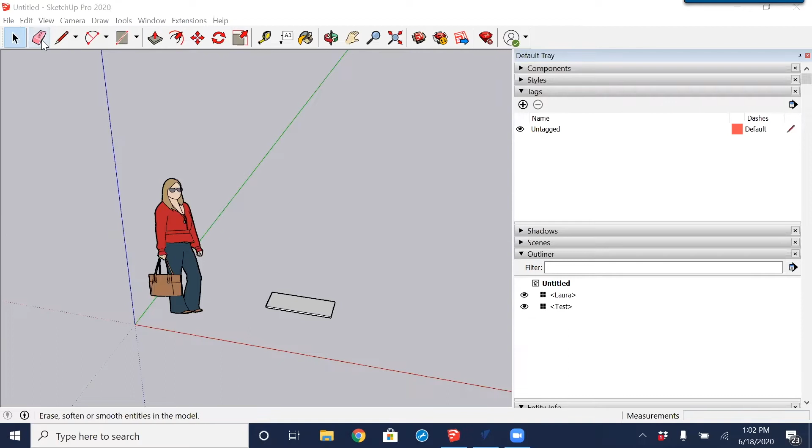Before we get into that, I'm just going to start off by going into SketchUp and doing New, so we can see right from the beginning. And no, I do not need to save that. And we are completely new.

So the big advantage of SketchUp is this thing called the 3D Warehouse. That is where you're able to upload and also download work that others have submitted to the 3D Warehouse. You could use the items just for decorations within your model for presentations. Some of the warehouse items can also be turned into VCarve Pro files. So we're going to take a look at the 3D Warehouse. That is found under the Window menu, clicking 3D Warehouse. We'll also explore how to create some of this.

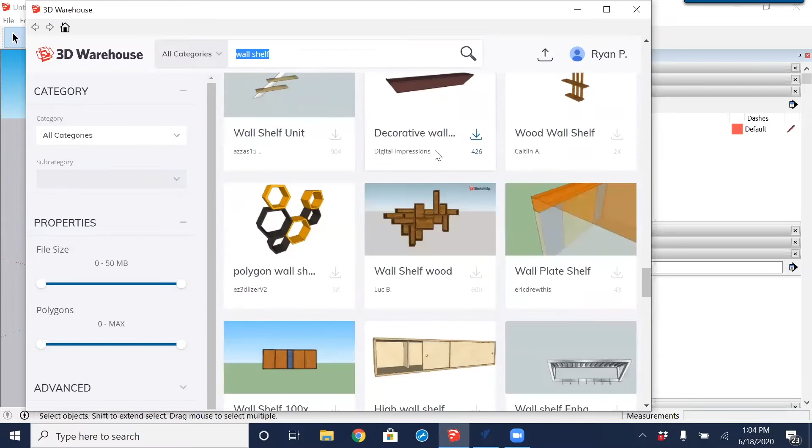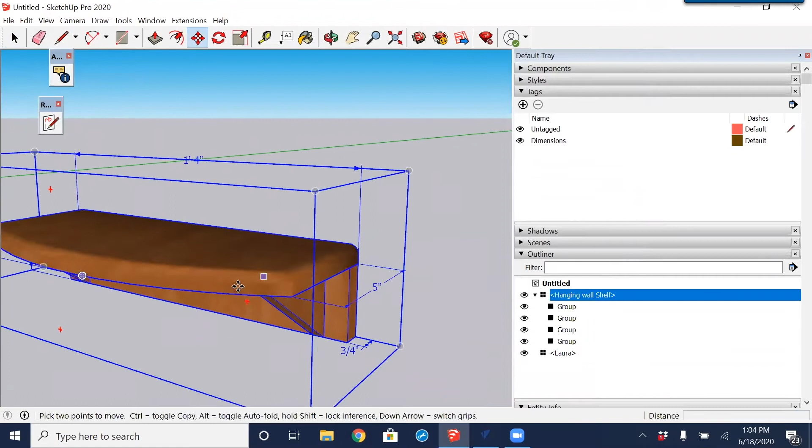So I just did a search here for wall shelf to see if there's any we might be able to just bring in, cut and export out. Not all of these warehouse models are created equal. Not all of them are able to be cut, and we'll learn why. So let's just try this hanging wall shelf here and select download, and I can download that directly into the sketch, place it on the screen, and click it there. So it is brought in right here. It does have some dimensions drawn in it, which we may or may not need.

And then we see that it is made up of components here. So this is a good sign that an item like this can be brought in as separate components into VCarve Pro to be able to orient and lay flat. So quickly to show that, and it may or may not work, we're going to find out. So I'm going to go to File and do a Save As.

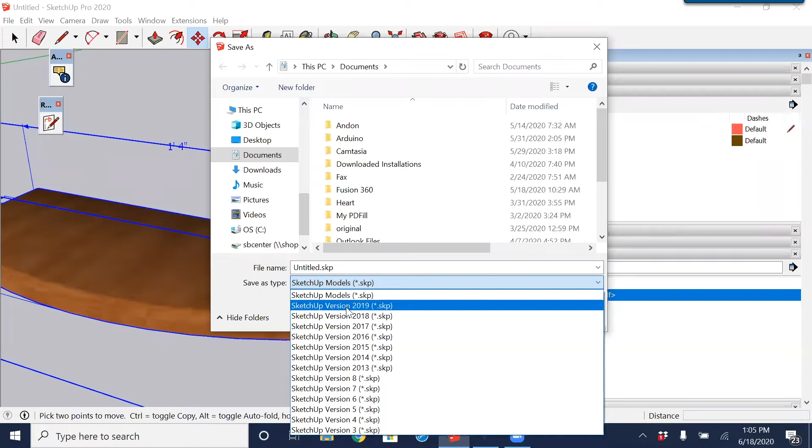And one thing that I have to do, and depending on what version of SketchUp you have, you may or may not need to do this: I need to back up to the 2019 version. The VCarve Pro import will not work with the newer versions of SketchUp. So I'm going to save this as a 2019 and just call that shelf.

And I am going to actually just put that in my downloads folder. The reason why I'm doing the downloads folder is that my downloads folder is a folder that I consider an okay-to-delete folder. So anything that I put in my downloads folder, I just know that I don't need to keep it. I'm okay to just randomly delete it.

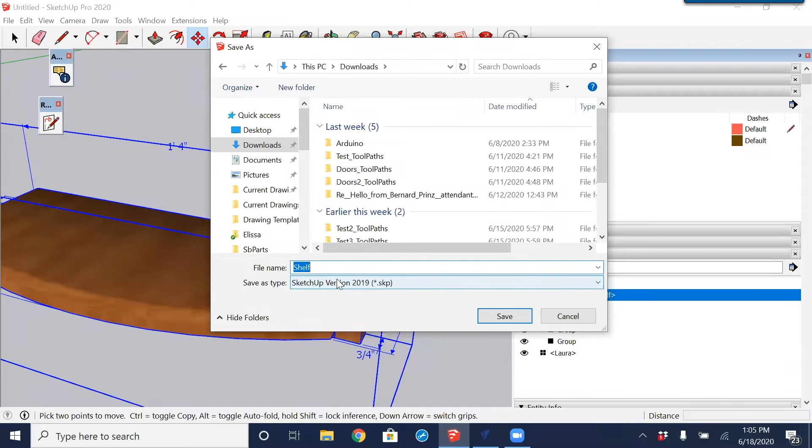So I'm going to give it a name of shelf and click save. Now I'm not making any changes or modifying anything in SketchUp other than I brought that in and clicked save. I'm even leaving Laura over here in our model, and we will see what happens when we bring this into VCarve Pro. So I'm going to jump over to VCarve Pro and create a new file.

You would enter in the size of material that you would like and the thickness of the material and select OK. This is done in the same type of fashion that we talked about just this past Tuesday when we worked with imported models, but you can just directly open up a SketchUp model. You could do that, but by doing that, you might have offset issues and everything else.

So when I'm importing models or items, I like to start with a new fresh file and enter in the material setup myself rather than letting the import fill in some items. So by doing this, I know exactly where my Z0, X0, Y0, and everything should be. So with that done, I'm going to go to File, Import Vectors. I could also click the icon right here that says Import Vectors into the current job.

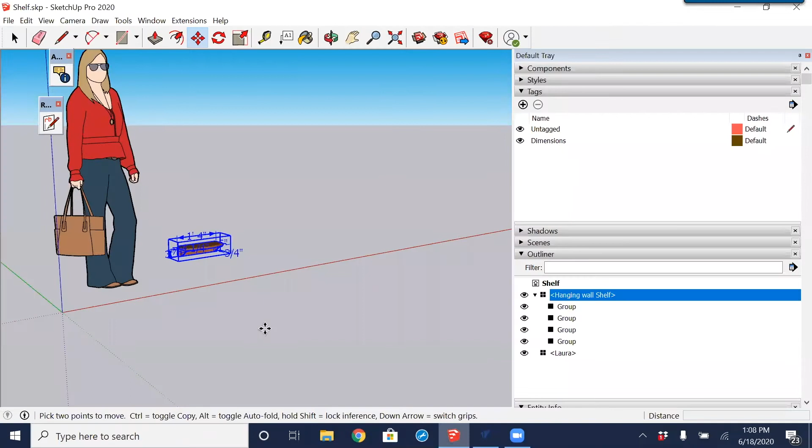So what we are going to do is explode this. I'm just going to jump over to SketchUp and look at this. So we have a bracket, a top, and a bottom to it. So 1, 2, 3, 4 different components are making the shelf up. The top part we need to have imported here, but these braces need to be rotated around so they're laid flat. And this is what this fill-in sheet here is trying to do for us.

So the auto orient is going to put the largest face to the top. And typically that's what we would want, and that pretty much works all the time. Then we have these layers over here. This is one of the features that I kind of got lost on when I was exploring and trying to prepare for this: the 2020 version of SketchUp changed the way and the location of layers. So I have a little learning to do myself, but we're going to still see how this is brought in. Right now, you can see we have 2 separate layers here.

One is dimensions that has 4 parts on it, and the other is Layer0 that has 2 parts on it. I'm not quite liking why only 2 parts. So I'm going to leave both of those checked and just click OK to bring this in to see what happens.

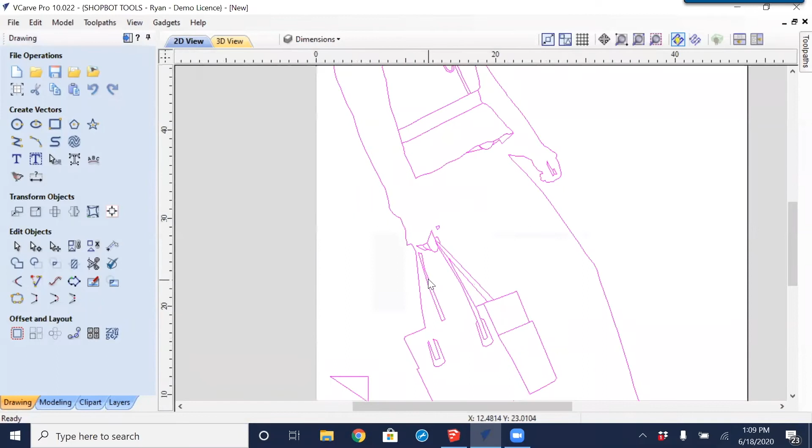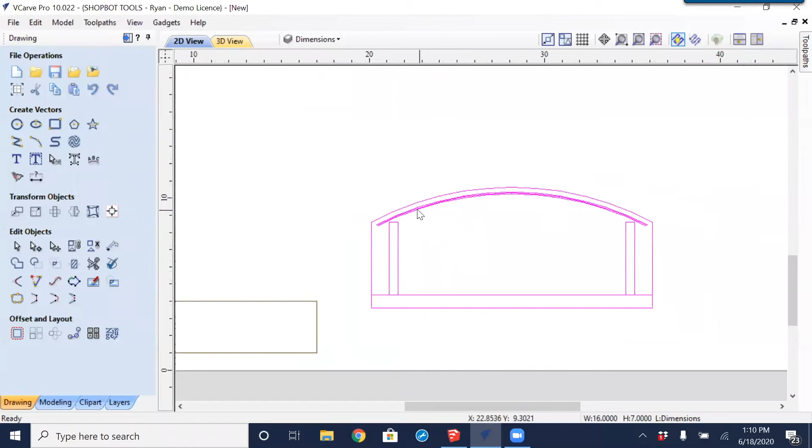All right, so there is Laura, and the items were brought in as grouped items. We can select Laura and delete her; we don't need her in our drawing because we're not going to cut her. I'm going to bring that top section down. So each imported object was created as a grouped item. Even though this is a single object in that group, it was still brought in as a grouped item. So I'm going to sweep select that.

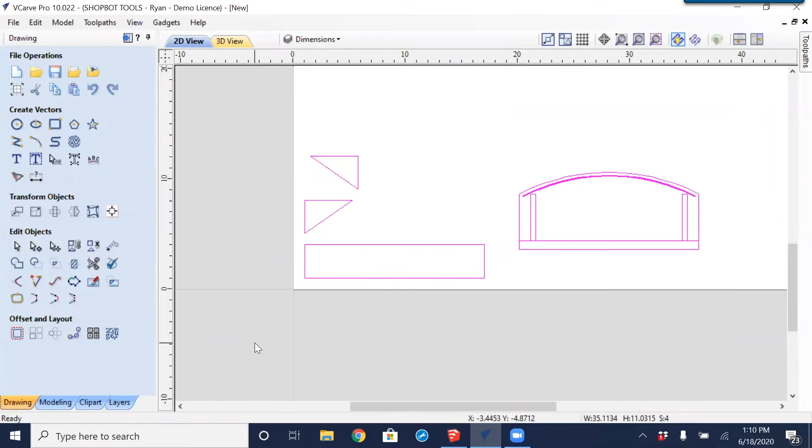And actually, I'll just do a sweep select of all. Typing the letter U on the keyboard is going to ungroup that to allow us to clean this up a little bit and remove the items. And we can come back and go over into SketchUp to see what all of this extra stuff was. So I just removed some lines there. This is the backer line that's going through here.

Looks like we had some dados, but you can notice the same issues that we had from Tuesday are prevalent here as well in our SketchUp model. So this is looking like it's created for a dado that we want to pocket out, but the lines are drawn in such a way that we kind of have overlapping vectors here. You can see the difference between the dotted line going here and over here.

So my guess on what's happening here is we have one continuous line or set of vectors that are joined together that start and go around and then come back through. This center section, we really don't need to have it there. I don't need this item here in the end. So I'm going to clean some of this up and remove it just to see what's happening and what this really looks like. And I showed this on Tuesday as well.

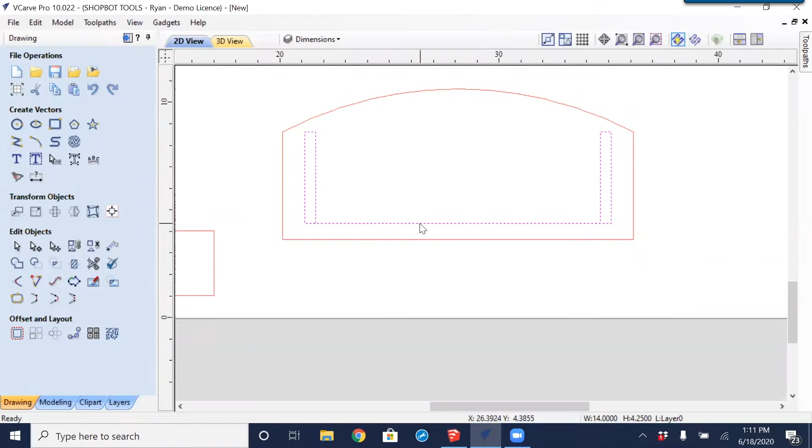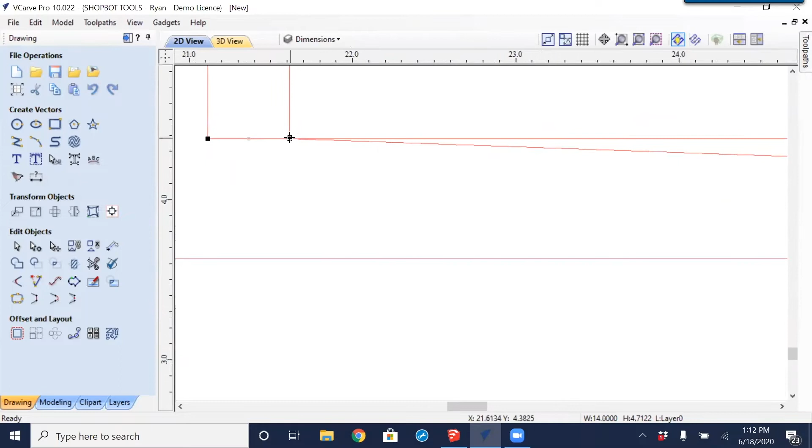But I'm going to hit the node editing, typing the letter N on the keyboard. Opens up node editing. And I always start with the start point, which is right here. So I'm going to just grab that start point and move it up out of the way, just so we could expose what's really happening here. And yeah, that's kind of what I had thought, that line is going straight around and up and over. So to clean this up and fix this, a couple ways of doing it.

One, since we have it broken apart here, I'm just going to delete these line spans. I'm deleting that because I know the shortcut command to delete that line span is the letter D. And I know it is the letter D from when I right click over top of a span. You could click delete span, we see that D, and just either clicking that or hovering your mouse over the top of the part and hitting the delete.

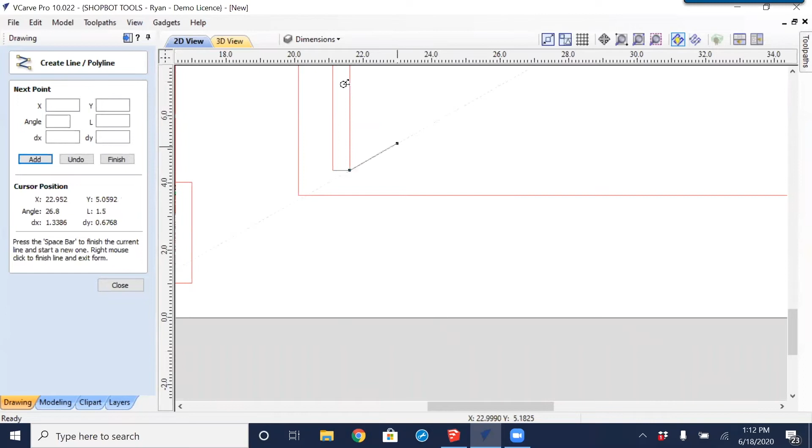At this point, I need to now draw in lines, and we still have the line tool function, but that is where I want to end. So I'm just going to hit the space bar. The space bar disconnects that line, but leaves the line tool opened up for me to come over to finish out the second shape over here. And I have to go through and join those together.

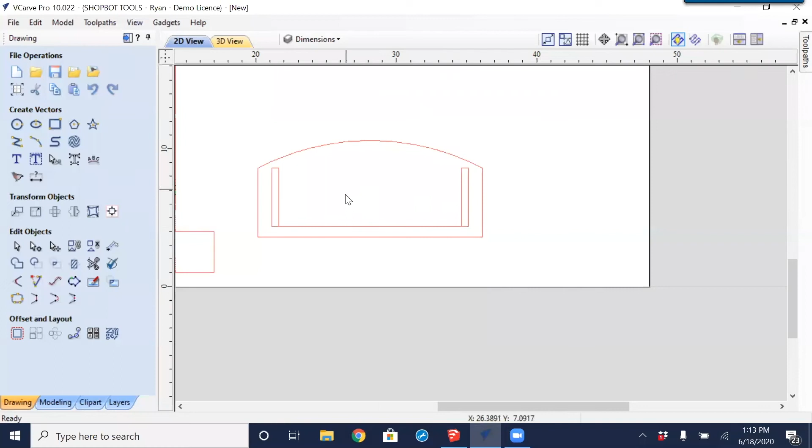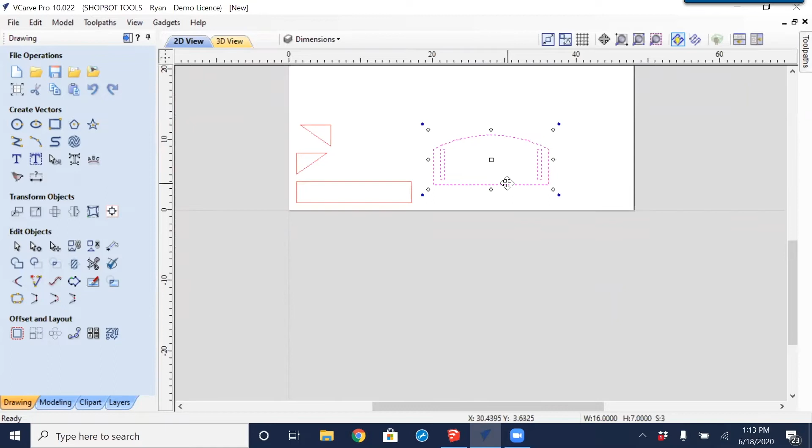But another method for this, I'm going to do undo several times back to the start and see what happens if I just use the scissors to trim the center of this away. And it looks like that was actually the better and faster method to get down to what we actually want. So at this point, we have our objects listed. We could move and drag those around, fit them best on the screen wherever we'd like to have them, and then toolpath them just as we would any other item.

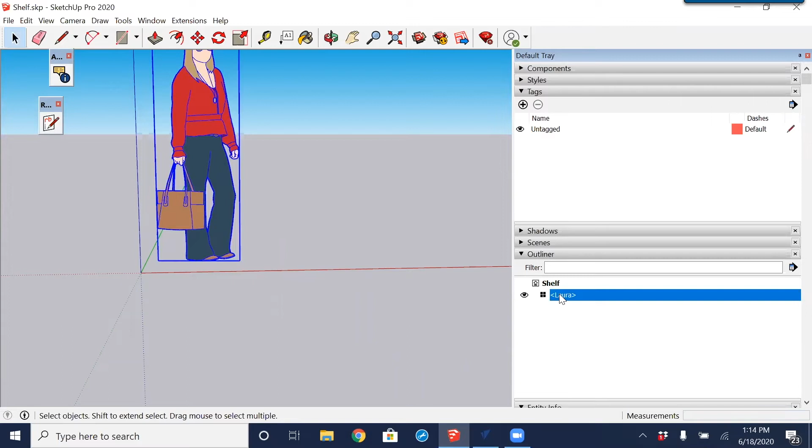So I'm going to jump back over into SketchUp and take a look at another item that could maybe be brought in. I was searching earlier. I found one that was created by Bill Young. So I'm going to go into our SketchUp model here and just undo everything that I've done. And Laura's still there. I could always remove Laura right now by selecting her either here, or if you notice under the outliner here, I could select it there as well and just hit delete on the keyboard. And Laura is no longer over top of our model until we start a new fresh drawing and model again.

So Laura sometimes helps when she's there, mainly because when you're bringing things in and out of the 3D warehouse, it helps give a sense of scale to know how big the model is that you're in, because you really have to pay attention to some of these models that are out there. They may not necessarily be designed or drawn to any certain scale or any units that were measured. The creator of that model may have been using it just for representation purposes, display purposes only, and really to them scale or size wasn't an issue.

So going to take a look at the 3D warehouse again, and instead of searching for shelf, I'm just going to do a search for CNC.

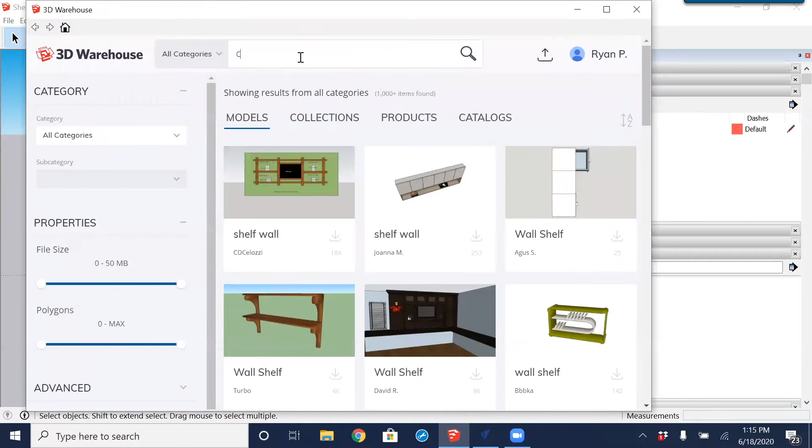Furniture, and you know, there's a lot here. So the reason why I was exploring CNC furniture is because it's the best bet that the folks that have uploaded these models most likely designed the models for themselves to go and open them up on their own and cut them on their own machine. After we download the Bill Young version, I want to come back and just explore what this open desk is. It looks somewhat interesting, so we'll see how that works out.

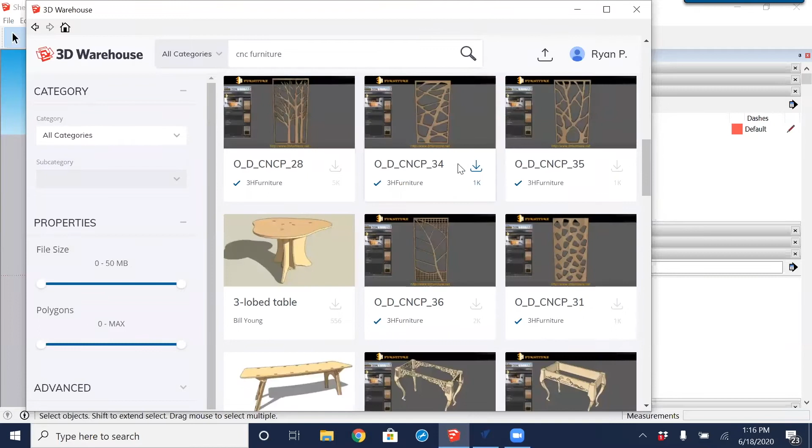Here is a table that has some contours and it's all slot together. So again, I'm just going to hit download, and yes, I'm going to download it directly into my model space. You drag it around, and once you click it, it is placed. So we have our imported table, and inside of that table, we have 1, 2, 3, 4, 5 different parts, or 5 different components that make up this table. Well, we'll get into that in a bit.

So I'm going to do File, Save As, again making sure that I use the 2019 version, give this one a name of table, and click save. Coming back into VCarve Pro, I'm going to import selected vectors, find the table, select open, and again we get the same fill-in sheet that opens up, orient the largest face on top, which is good. We'll say okay, and the parts get kind of laid out. They're not nested, they're just placed on the screen. So at this point, we can choose the nesting function here.

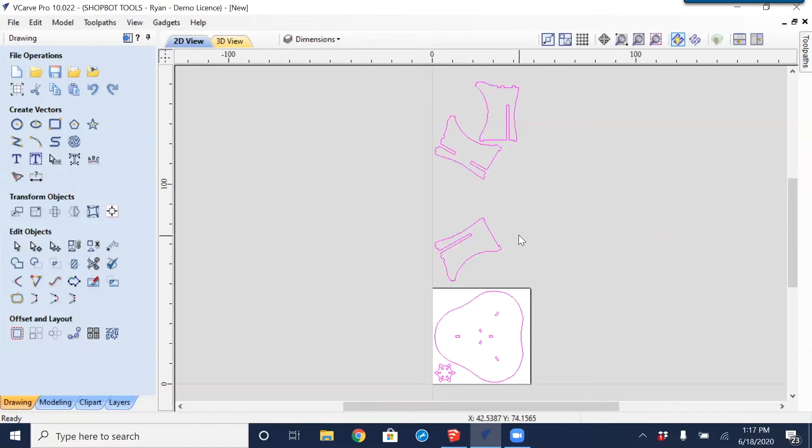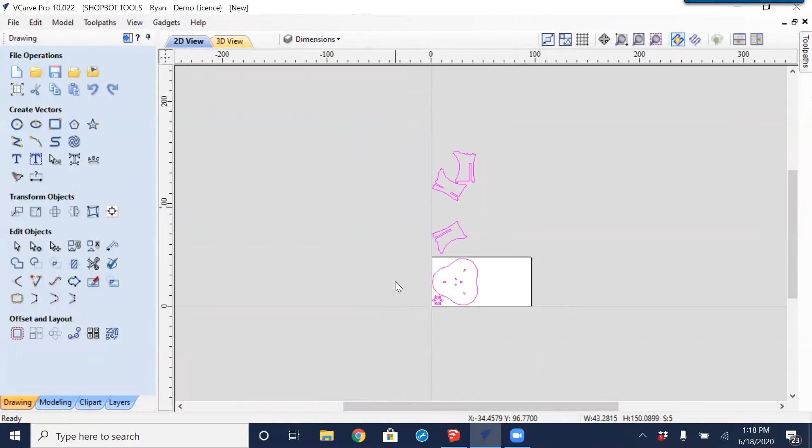The one thing I want to do is increase the size of the material because I have 4x4 here. So going into the job setup and dimensions, I could enter in the X value to be 96. So I'm going to cut this out of material that is 96 by 48, 3/4 inch thick. Select OK. Now to nest this, I'm just going to do a sweep select of all of those objects, click nesting, and enter in the parameters for the toolpath.

So the tool diameter I will cut this out with is going to be a 3/8. I'll probably go with a 1/4 inch because we have some slots that I have to worry about, and I don't want to have to tool change. The clearance between one part to the next, I'm going to make that a little bit bigger. If I was doing this as cabinet making, I would probably set that clearance to 1/8 of an inch. But for organic objects like this, where you may not have a vacuum hold down, using tabs, you're going to possibly need a bigger space between those parts. I'm going to allow rotation to get a best fit.

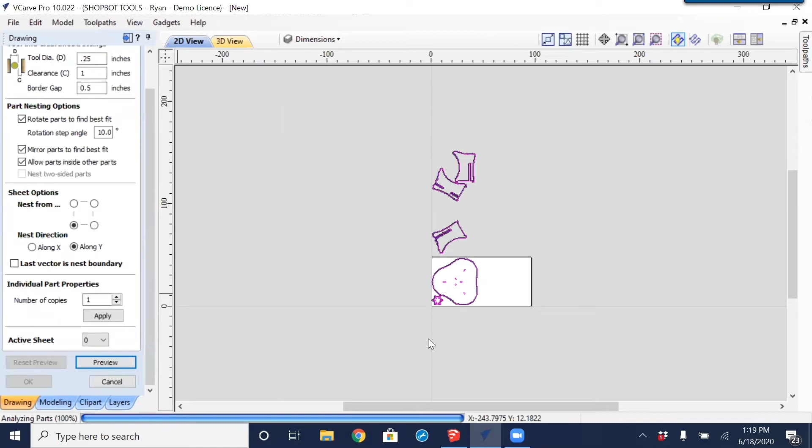And once all those parameters are entered in, we could click preview. The preview is going to give us a quick little preview of what is happening here. And, you know, I hate to have to cut onto a second sheet, and it's probably coming from this clearance here. It really looks like I'd probably be able to fit this on one sheet. So I'm going to reduce that clearance down to 1/8 of an inch and click preview again. And sure enough, now we're down to one sheet to fit, maybe even parts like this.

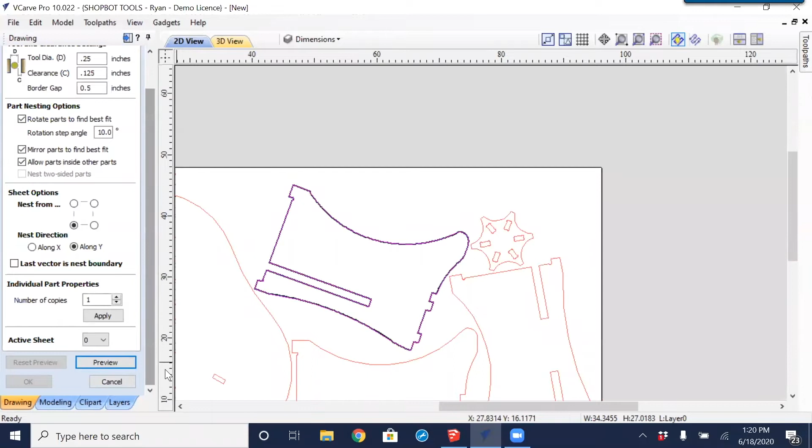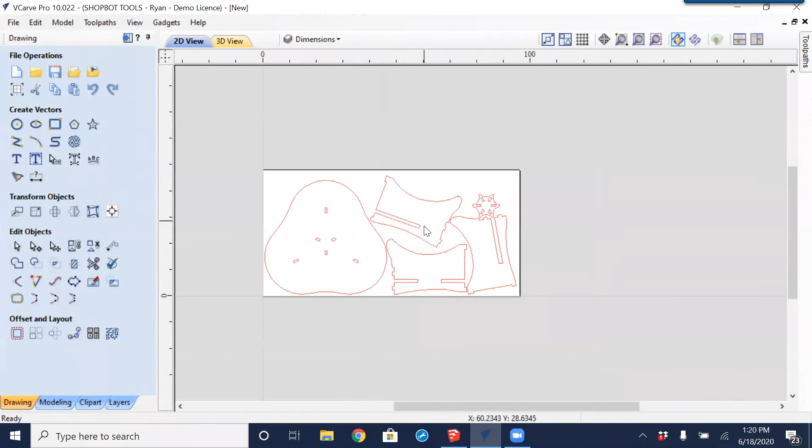Once I get it nested, I'm going to do a select all. We're still there. We'll preview that, and then I would select OK to have those placed there. There's a couple of things that I probably want to do, like rotate these around to where they're flowing with the grain a little bit better, which means you have to manipulate and move parts around just a little bit. But just know that this is how the nesting works, and nesting does a good job when you have a lot of parts. If you only have a few parts, you might be able to do the nesting a little bit faster or better by doing it yourself.

All right, so that is a little bit on importing existing made models out of the 3D Warehouse and bringing them in. What we're going to take a look at now is the differences of what models are, how they work within SketchUp, and what is a component. Similar to what we have had in our Fusion sessions, where we're able to make individual components, and then with the individual components, we're able to combine them into one final object. So we're going to just create a basic box and square for this.

So coming into SketchUp, we'll just go File, New. And there is Laura again. So I'm going to select her and remove her and ask her to leave my space.

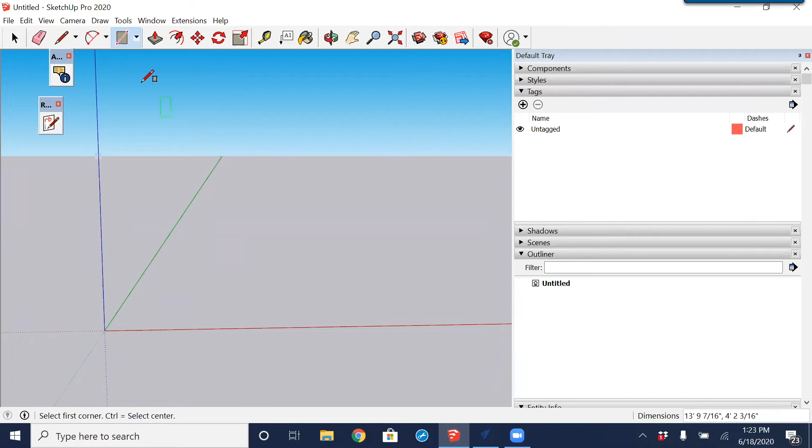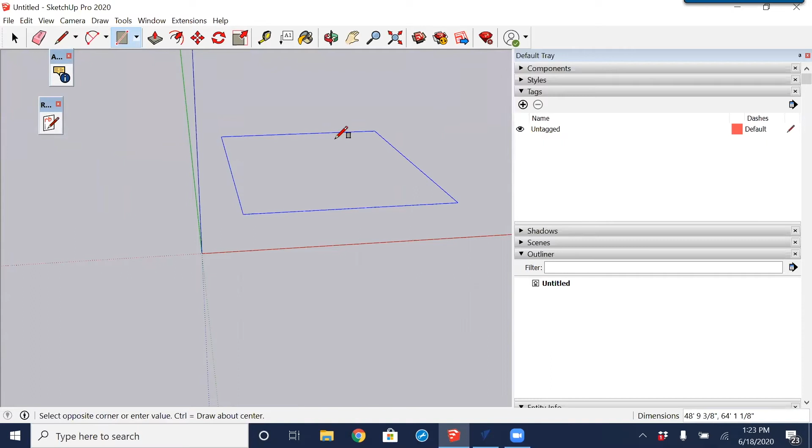So to size this, I'm going to select to draw a rectangle, and then I'm going to come down here into the drawing space and click once. Try that again. Click. And it is listed there, and we see it's drawing there. But if I want a 12 by 12, let me rotate around a little bit so we could see how that is being drawn. So right now we can see that it is being drawn on the X plane and the Y. And if I want this to be, say, 30 by 12, I could just enter in 30, 12 and then enter, and it is going to give me a rectangle that is 30 in the X, 12 in the Y.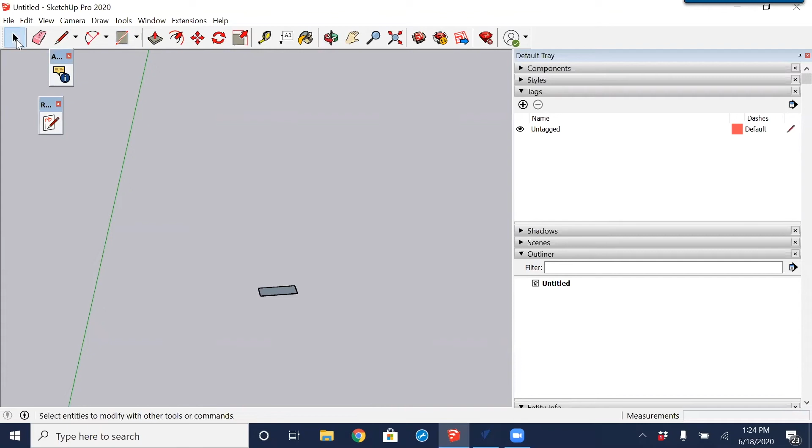Once we have our drawing, I'm going to use our selection tool over here, and it has a perimeter to it, and then the interior here. So this is a flat 2D surface. It is a little bit confusing because right now we have edges that we're able to select, and we're able to delete those edges. I could also select the center here and delete that center to be only left with the outline. Well, that's not what I want to do. I want to leave that shape together, and I want to be able to give this a little bit of thickness.

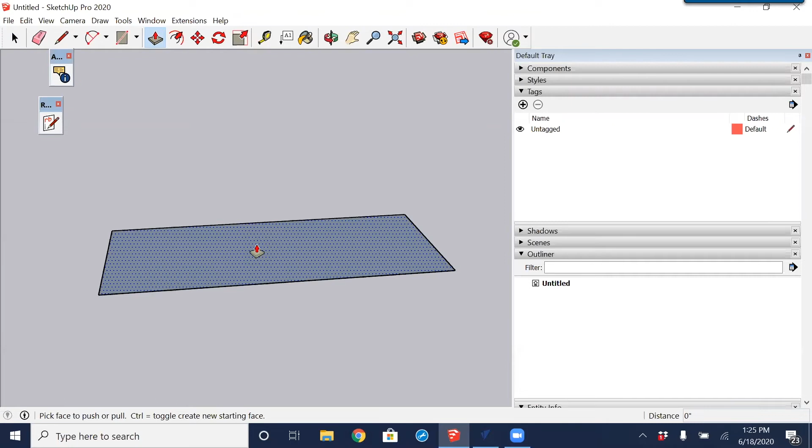And if I wanted to create, say, a box that was made out of 3/4 inch material, we need to draw the shape here and use the push-pull tool, which is going to hover over top of the 3D facing surface. And you see it gets all these little dots in there. That means when you click, that is able to be selected. So selecting and clicking there, I'm able to pull that up or move it down. To go an exact distance, you start moving your mouse and pulling it in the direction that you would want to extrude it. And if I want this to be 3/4 of an inch thick, I'm going to type in 0.75 and then enter. So that gives us a panel that is 30 inches by 12 inches by 3/4 inch thick.

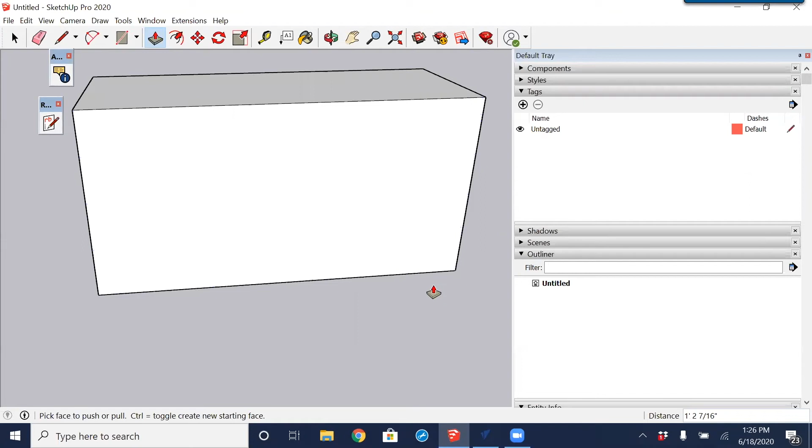To scale or change this, I would need to scale this, and you would scale it by a percentage. I don't like doing that method, so I'm not even going to show it. But just to point out, we are still not a component. So we are still able to click on this part and drag it and change that size. But I have no idea what size that is, so I'll just do a Control Z.

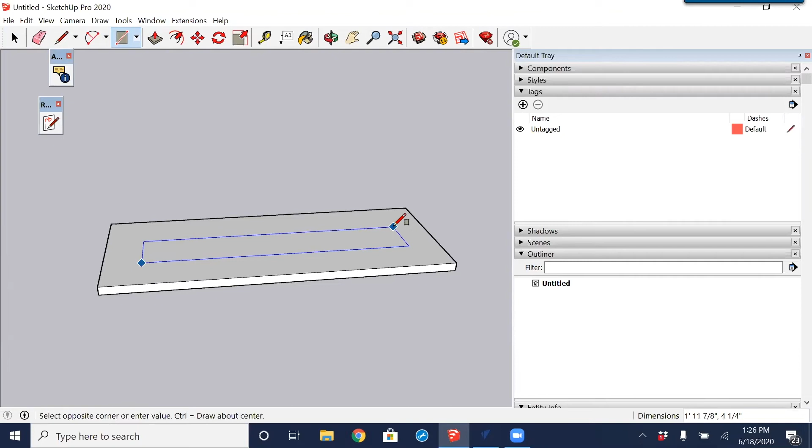I can always come up here and draw another shape over top of that shape, there to there. Use the selection tools, or even if we just drew, say, a shape inside of here. And now when we use this push-pull tool, we could see the difference. So I could pull just the center up or just the outside of this up. So basically, you think, well, I got a box there. We're able to import and cut this. Well, when we go to import this into VCarve Pro, we're only going to get one object, because this is all just one object with a hole or a slot cut into it. So that's not how we would want to make this box.

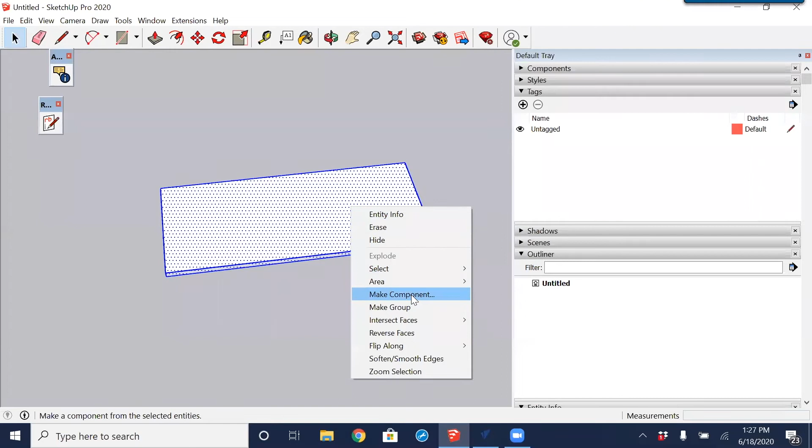So I'm going to undo, getting back to where we just have only that panel, and using the select tool here, just going to do a sweep select of the entire object. It's not a component yet, the entire object. And now I'm going to right click and say make a component. And it now gives you a little bit where you're able to define what this is. So I'm going to say it is a side, and I will say create.

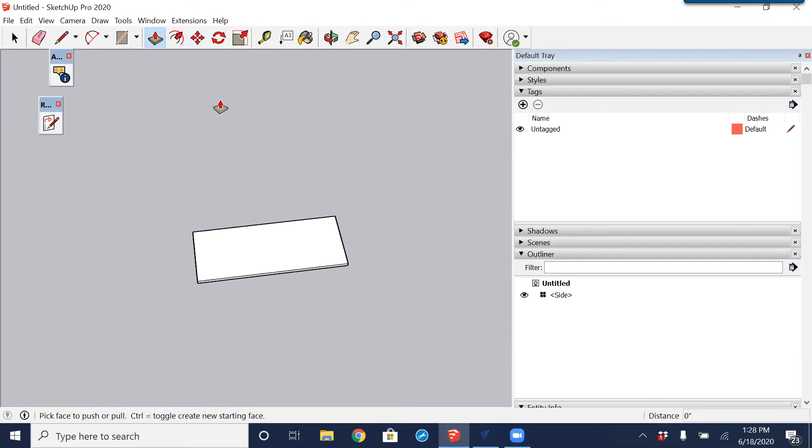So at this point, it is one item that is not able to be extruded or pushed or pulled in the same way, because it is a component. And now when we draw anything on top of this or next to it, it is separate from what we have here. So to maybe create, say, kind of a wall cabinet or something here, I might want to rotate this up. And the rotate works where you have like a protractor here.

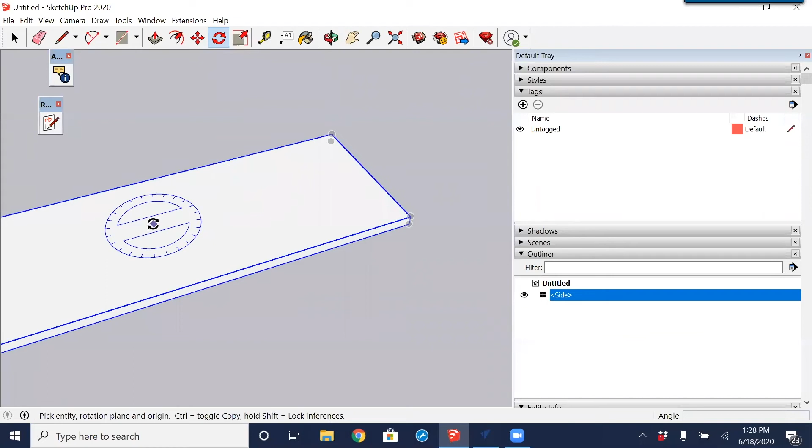And we see if I click it here, it is only able to rotate it around X and Y, which would be about the Z. But I kind of want to stand this panel up. So to do that, I'm going to make sure it is on the Y plane, on that side there. Move my mouse out to the right, and I can move it up. And the bottom right of the screen is showing the angle there. So if I just type in 90, it's going to rotate it 90 degrees up.

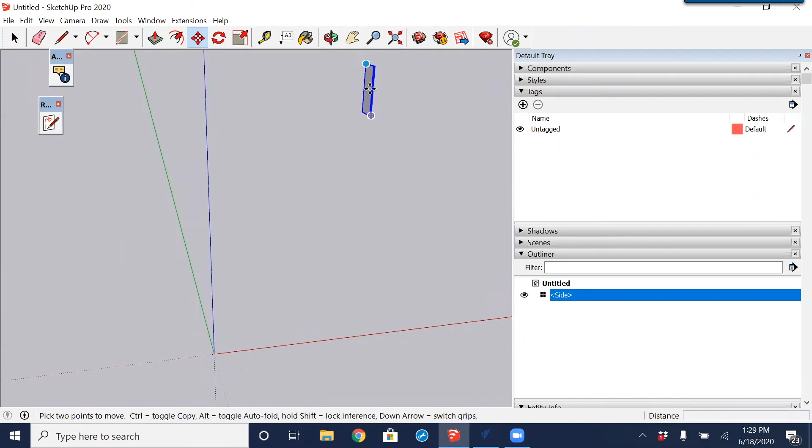So to help organize and kind of get the feel for things, I am going to move this object, and when I select it, you can see it's kind of snapping to the points. I'm just going to click there and bring it down and snap it to the center of origin here. That just helps keep things a little bit more organized and together, and this is what we have.

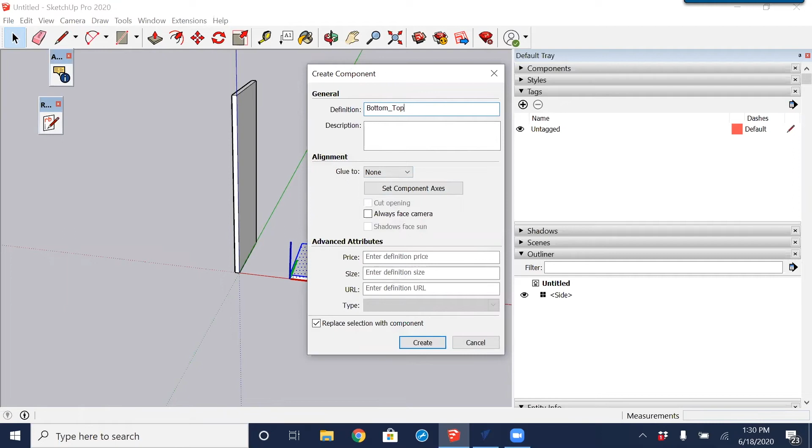So to create maybe a bottom to this, I could go and draw another shape. And again, I should have sized it. So I'm going to click there and drag it out 12, 12, just to make it a square. We'll increase that to 0.75. And I will again go back to the selection tool, do a sweep select of this object, and make that a component. So again, right click, make a component, and I will name it bottom, and maybe underscore top, because it could be a top or a bottom. Select create. And now it is an item that we could move around.

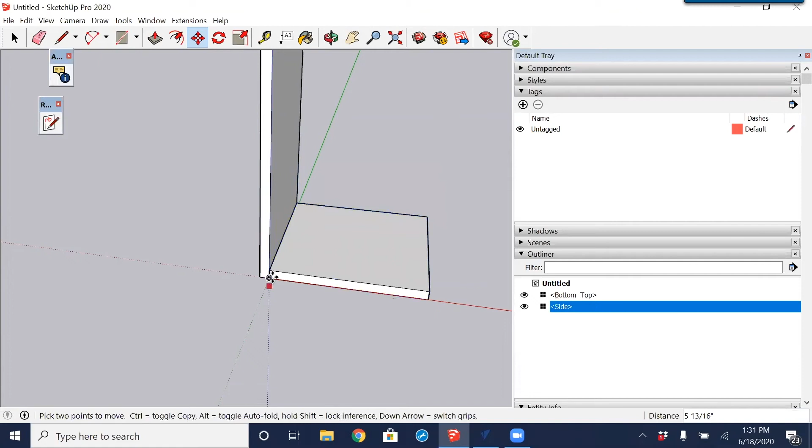I'm going to zoom in just that lower left, and going to click right there to the other side. And to make a duplicate of this, as I am dragging this, and this is one that I probably won't get the first time. Nope. I believe it is maybe the shift key down. One of these buttons, when you hold it, it makes a copy of it. Do a Control Z to get back, now that I found the right button. So I'm going to drag it up just to make that copy.

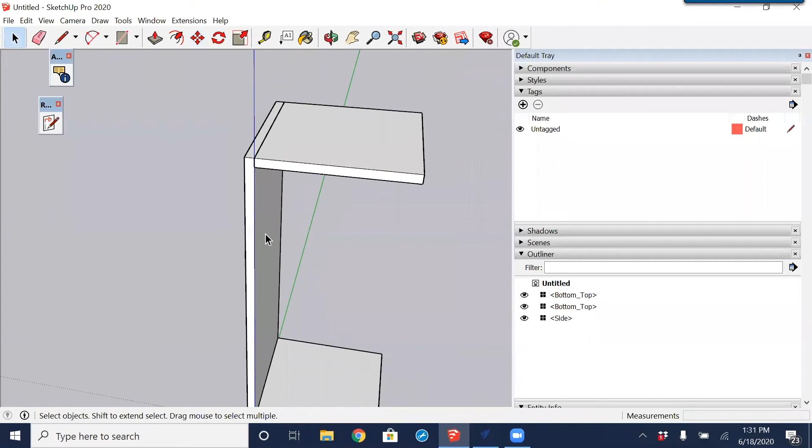And now I'm going to grab that line to this line. Also, again, we could take... too many keystrokes right there. Now for the side, I'm going to take that side and make a copy of it to make it a right side. So using the move. And now we have kind of a basic cabinet.

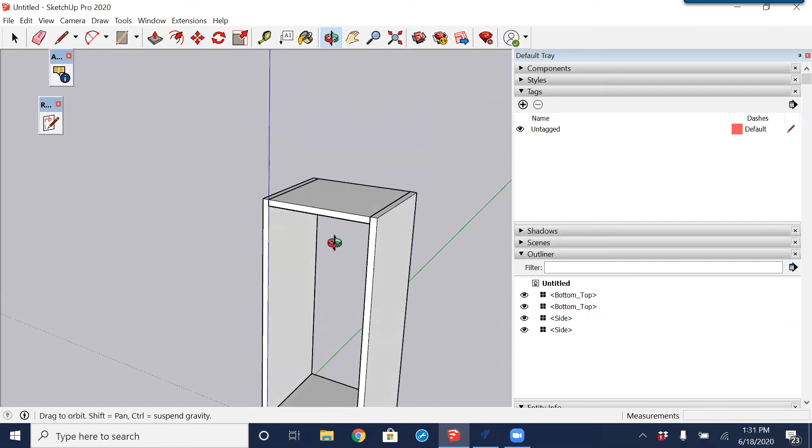Now, there are much more advanced features that we are able to use to make this what's called a dynamic component, where we're able to modify and link all of these shapes together so that when we draw one item, all items expand out the same. So I'm going to now open up one that I've already created just so we could see what that dynamic component looks like and how it completely works. But know that I created the cabinet just that same way.

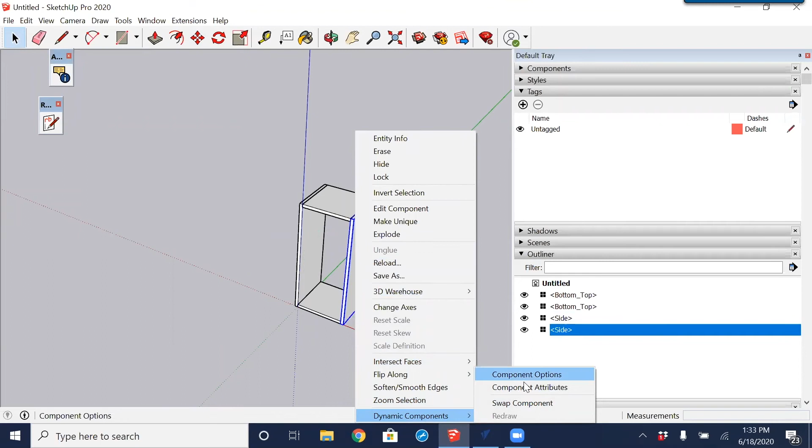So to answer the question, it was the control key, holding the control button down. As you move that, it is going to make a duplicate copy of that. So sorry to have not stated that. So that is basically a creation of a cabinet or a box. Just to maybe point out here, I'm going to right click on the component and come down here to say dynamic component attributes, just to point out how it works and what's going to happen here.

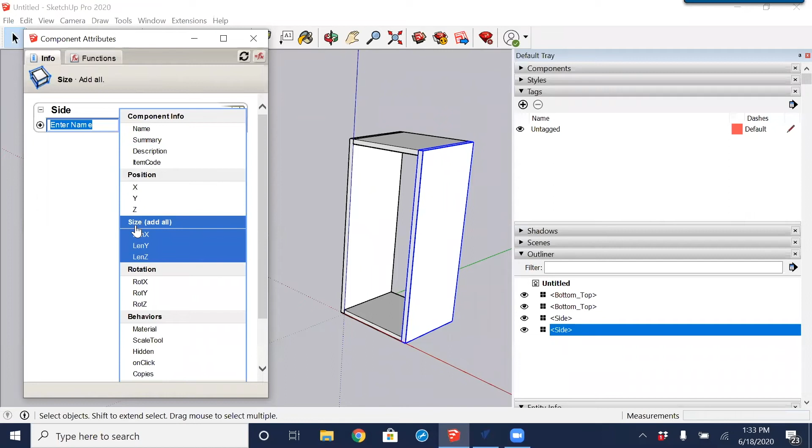So that is the side that we're doing. And if we click the plus button here, we're able to add attributes to it. So what do I want to do? I want to change the size of this. So I'm going to add all of that. So there we see that is right now 30 by 12 by 0.75. You could double click in any one of these, and if I want to make that 15 inches deep, you would just hit 15, and there it is now 15 inches.

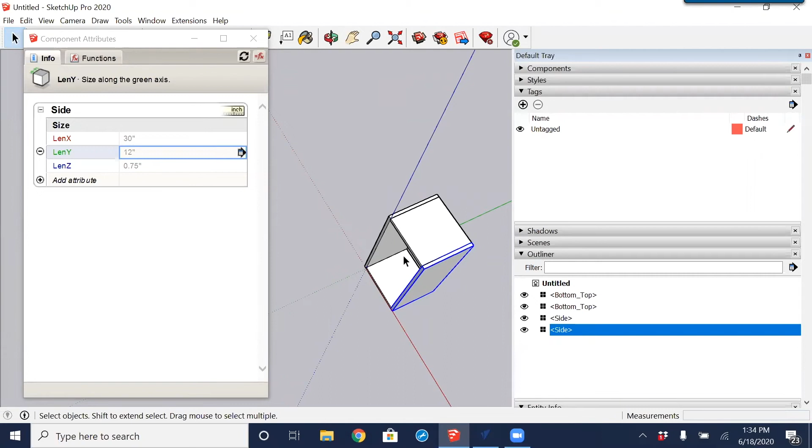The key to making this a whole dynamic component is we are able to have kind of components within components. So I will kind of point that out and show what that is. So right now we have 4 separate components, a top and a bottom and 2 sides. So selecting all of those objects, right clicking, and going to make that a component. And just give that a quick name.

And now underneath of this cabinet component, you can see now when we select it and I move, all of the other components move and go with it. So now we have those 4 separate components, and we could make this whole object a dynamic component. So going to take a look at what that is just briefly. Under component options, no. Under component attributes.

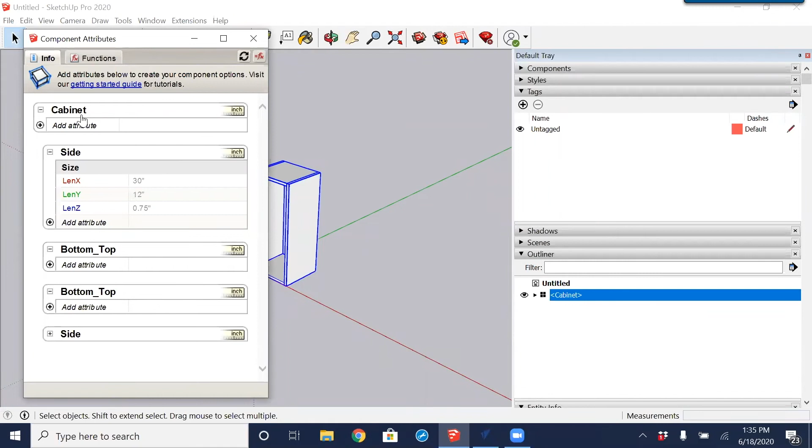So now, rather than just having that one here, we have side, bottom, top, and the 4 different components underneath of the cabinet component. So we have under the side, here we have the sizes, and we're able to make up whatever component we want to have here. So again, if I want to have the size of this, what this component is telling me is X is 13.5 inches, which is the total width of this box. And the height is 12 and the Z is 30.

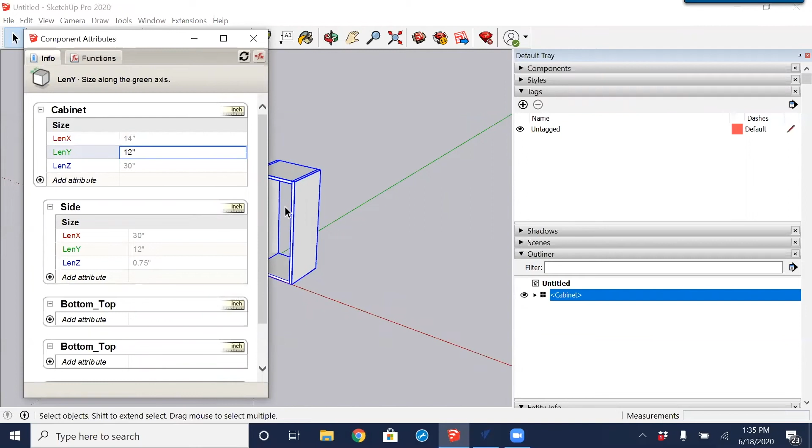Changing any one of these numbers on top really isn't going to do anything for us because we need to also change the other components. So the side is going to be the easiest one for us to modify. So let's say if I want to make the sides 30 inches high, I'm just going to come down here to the 30 under the X value, which is 30. And I am going to say that I want this value to be equal to the value of the Z. It's equal to the Z, and we'll say okay to that. So it's still 30 inches.

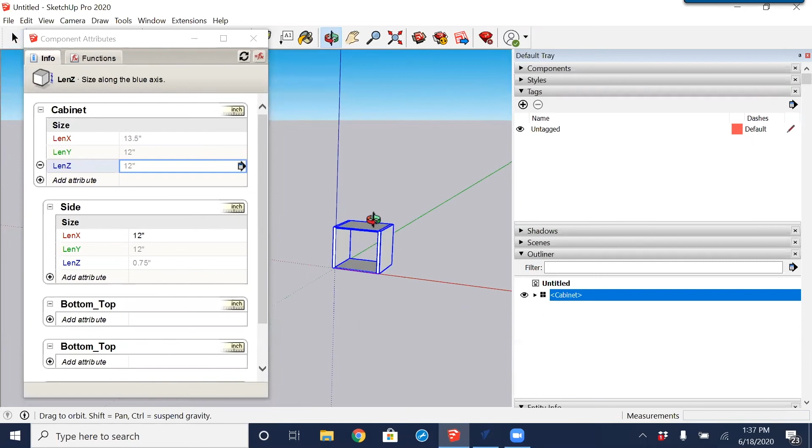But now when we go up top here and make this 30 at 24 and move over, we can see that everything has shifted now in size on our cabinet here. So again, if I wanted it to be 12 inches, enter, we can see it is now 12 inches. So you're able to modify the size and the dynamics of each other component based on the nested components, or you could control the nested components of the main component by linking them together in this way.

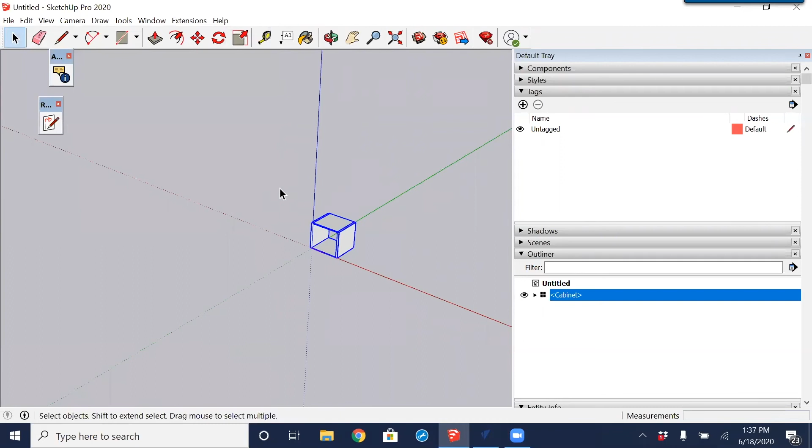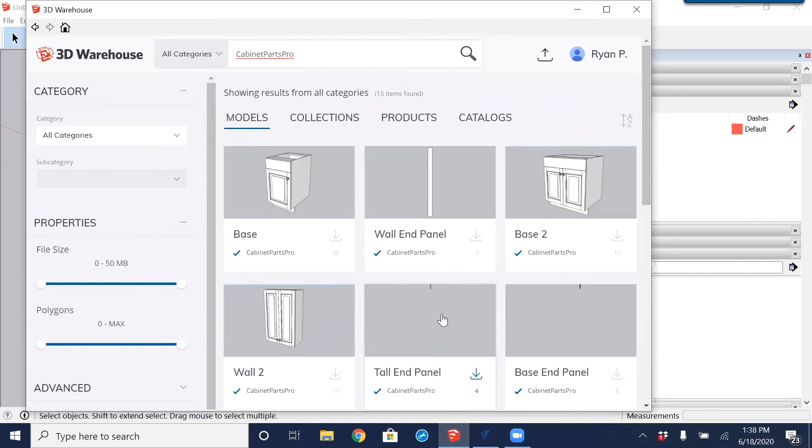So I'm just going to point out one that I have already completed that is in the warehouse. So if we go to Window and then 3D Warehouse, and the great thing about this is I am able to come up in my button here, and I could view my content. So all of my models, and why is it empty? Not sure. So let's see if I do a search. So here are components that I have created, and we could just click on any one of these and bring it in.

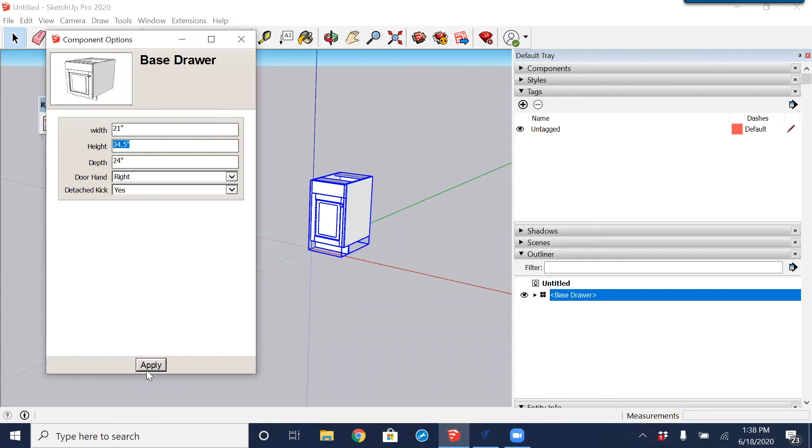Let's click on the base cabinet and load this directly into our model, and there it is. So we now have a dynamic component that we are able to completely change the size and the look of this cabinet simply by right-clicking on it and coming into the component options. And now if I want the cabinet to be 21 inches and not 18, I would select that, select apply, and it is going to increase in size to 21.

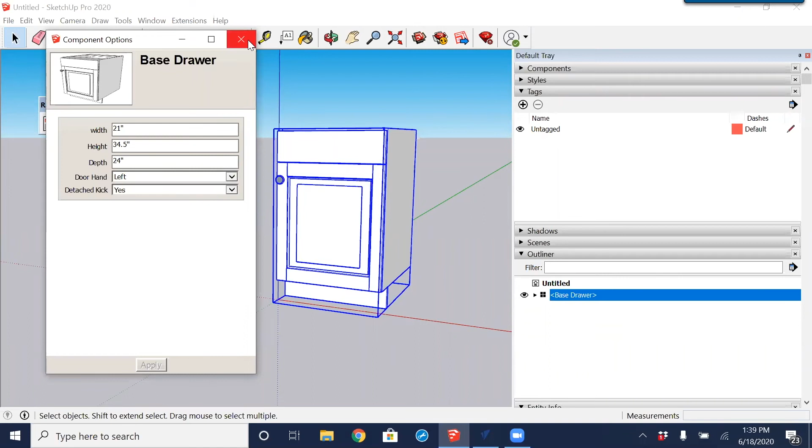If I want it to appear that the door is hinged on the opposite side, to make this knob on the left side rather than the right, I would change the door hand from left to right, and that is going to give us the appearance that the door moves to the opposite side. So with showing that, let's do a quick save of this to see how this is now brought into VCarve Pro for us to cut. So I'm going to go into File, Save As, again making sure I'm saving it as an older version of 2019.

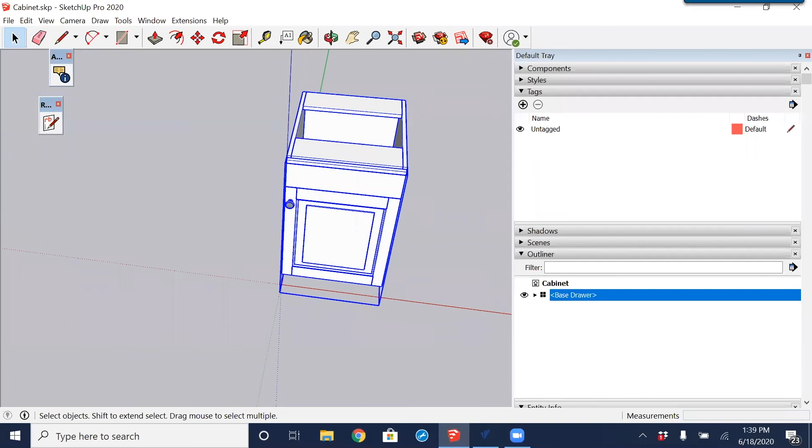Coming over into VCarve Pro, just do a sweep select of everything here, delete those objects, and do an import vectors. Select the cabinet, open. Going to leave everything as default. We have a total of 18 parts. Wow, I'm not sure why there's so many parts there, but I believe that's in the door. So we'll see what happens here. So I'm going to say okay.

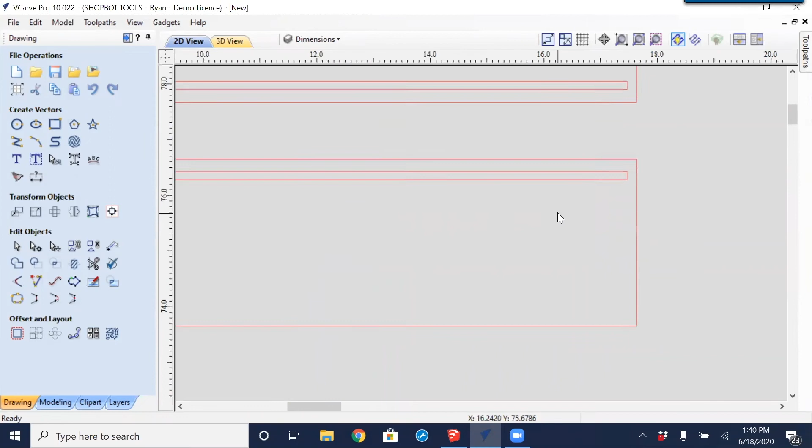And yep, it's even brought in the cabinet knob, which we do not need. And there are all of the components that make up that cabinet. There are some components that we may or may not need, but we could remove those. I'm not sure what some of these components are for, but we could certainly come back over into SketchUp and analyze that a little bit more to see what some of those parts might be from. I think some of them are the door panels and such.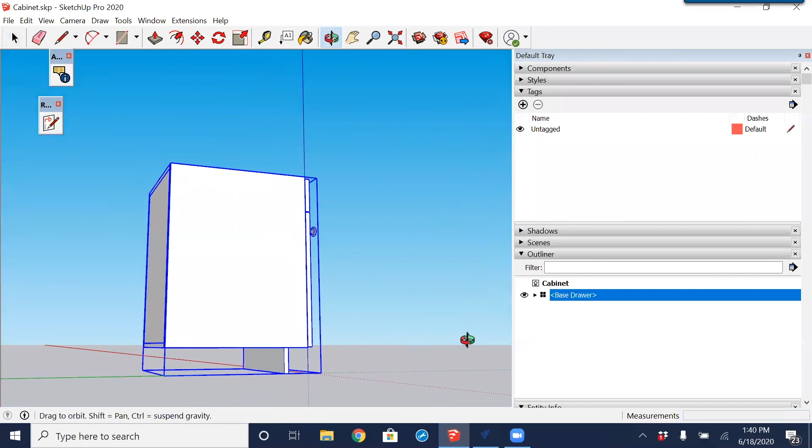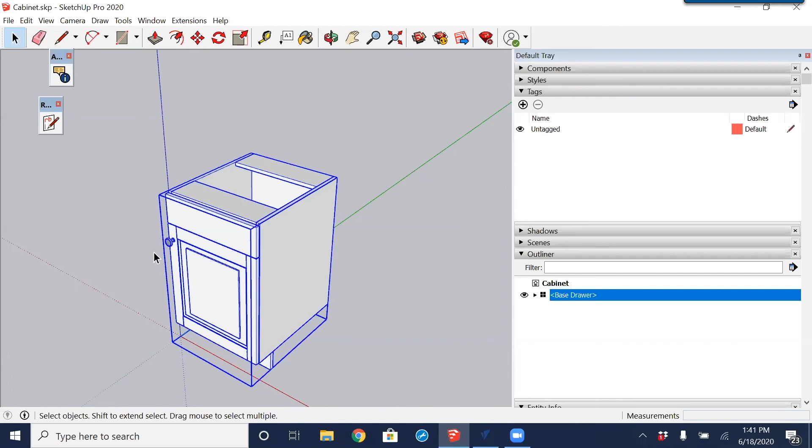But anyway, I just want to say that bringing in models from SketchUp into VCarve Pro can be done. It's fairly easy to do, but it's also a challenge if you are not the creator of that part to know what all the components and parts are when you bring them in. So this is a fairly basic example of SketchUp. I hope that is somewhat useful.

There are extensions within SketchUp too. That's what I just did. I don't know if it's working. There are extensions where you could export into other software that will then eventually just lay out parts for us. So there we have it. It's brought in a lot of them. I don't know why, but it brought in a total of 24 of them for us.

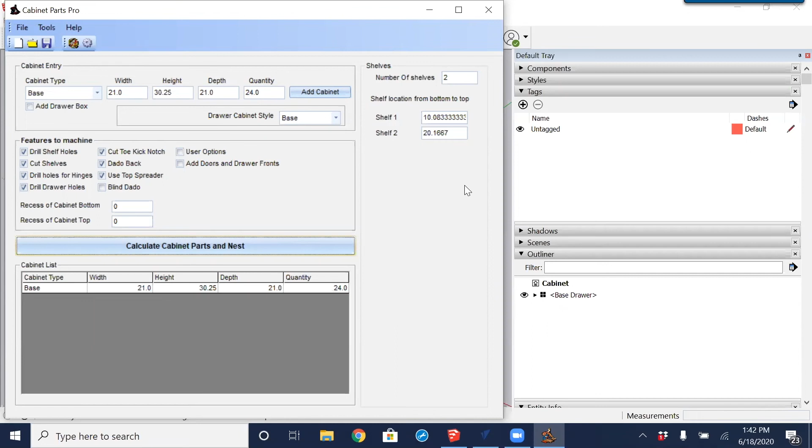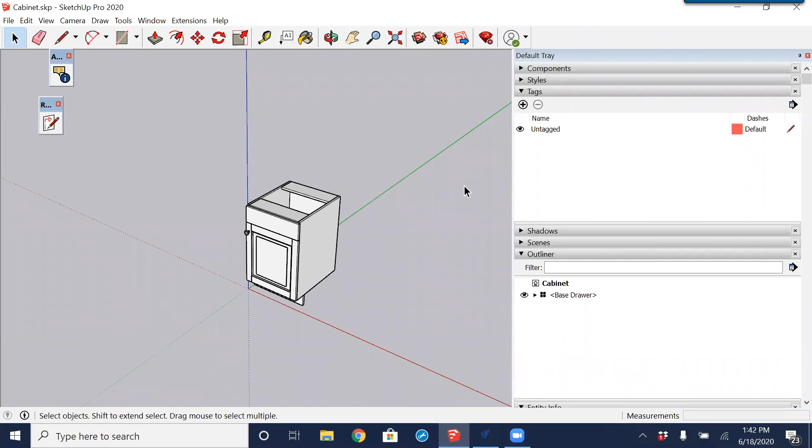SketchUp is nice. It's good for visual displays. I don't know if I would really use it all the time for design purposes as far as drawing out, but it is great for representing what you would like to make, to be able to visualize what the product is going to look like before you make it. And it's a fairly easy 3D software to use. And again, with the 3D Warehouse, being able to import other items to help decorate your drawing might make visualization of the product easier to present to a customer.

There are also rendering type applications that are able to take the SketchUp model to a rendering to get it to be almost a photorealistic item. Some items like that cost money. Some are free. What you pay for typically depends on the quality of the rendering that you get. That is kind of the basics of SketchUp and being able to import those into VCarve Pro.

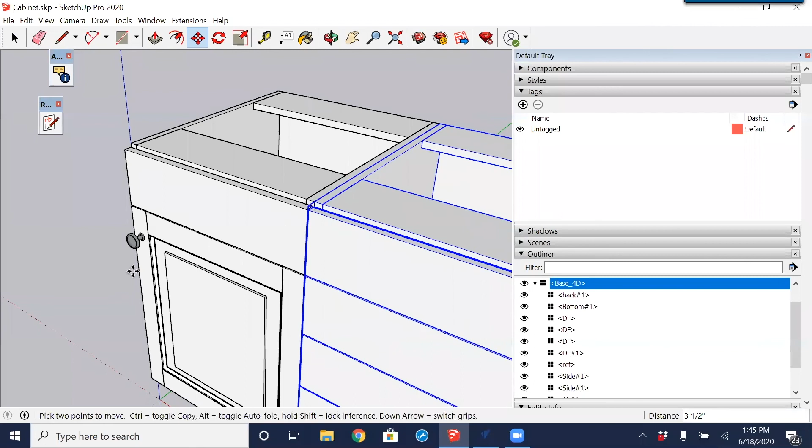You can use VCarve Pro to cut the cabinet parts out. For cabinet making, you would want to use more of a specific program for that, and that is what the extension here did. So if I wanted to bring in another drawer base, you can download that and bring that right in, move it around to get a visualization and layout of it, and then go into the extension.

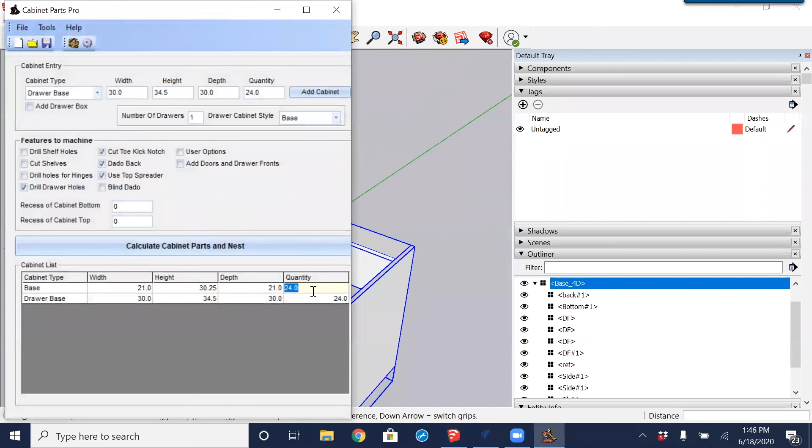It's an import. I know that's a base cabinet, so I'm going to say a base. Okay, and the other one is a 4-drawer cabinet, so I'm going to come down here and say it's a drawer base. Now we have the cabinets in this list here; for some reason it's bringing them in high quantities, so I'm going to reduce that to 1 and 1 and click calculate. This software is also adding other features to the cabinet rather than just bringing it directly into VCarve Pro, where we would have to add them in, unless the component has the holes and all the other features and functions there.

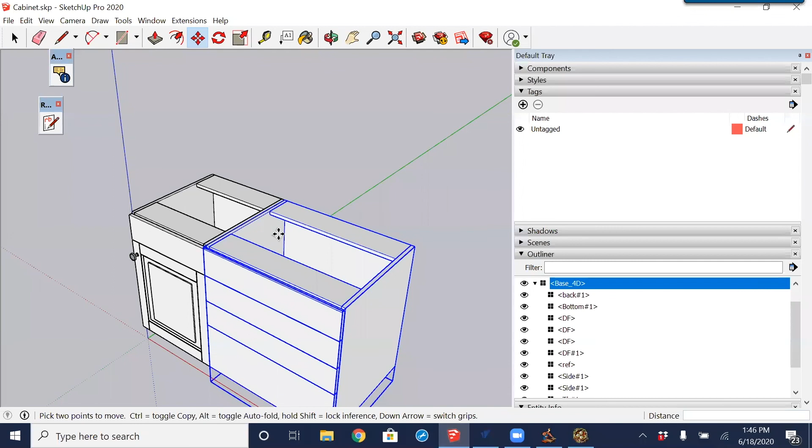The difference between the paid version and the free version: I don't know all of the details, but I do know the free version does not allow you to create dynamic components. And I don't believe the free version allows the component options. So for example, with the free version, going to dynamic components and selecting component options, I do not believe you would be able to change the size of the component. The dynamic components are the reason that I have the professional version. The paid version is to be able to create the dynamic components.

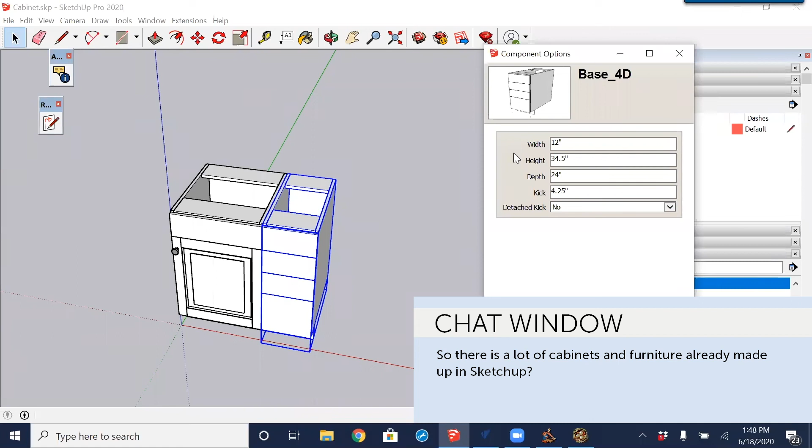So yeah, there are a lot of cabinets and furniture that is already made in SketchUp and that you're able to use, lots of them there. Again, you just have to be careful because not all of them are able to be cut or imported in a way, because they may not be made up of separate components, or the creator of that part may have just designed it as an interior designer to be able to present to the end user what their living room is going to look like, or what their kitchen is going to look like, not necessarily to bring into VCarve Pro or any other CAM software to cut.

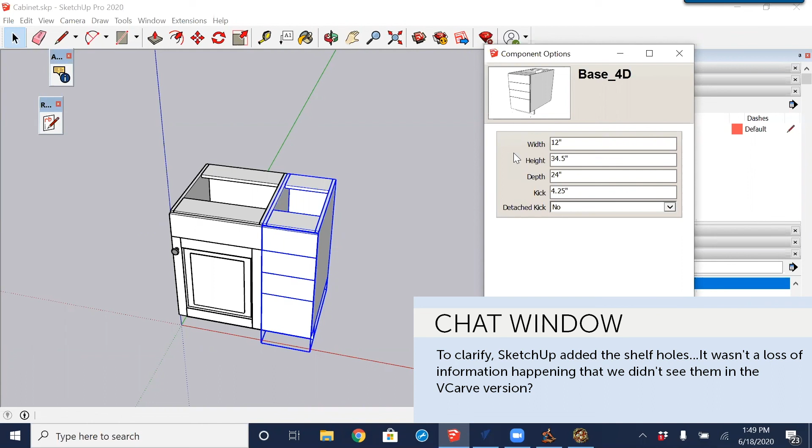So as long as they are made up of separate components, you're able to bring them in and lay them flat and kind of break it apart to be able to cut those on your ShopBot. So VCarve, yeah, so no, I showed two things there I probably shouldn't have shown. So one is coming into VCarve Pro, there are no shelf holes inside of this cabinet, there are none here on this cabinet. So VCarve Pro is not going to be able to add anything that is not already in the shelf or in the cabinet.

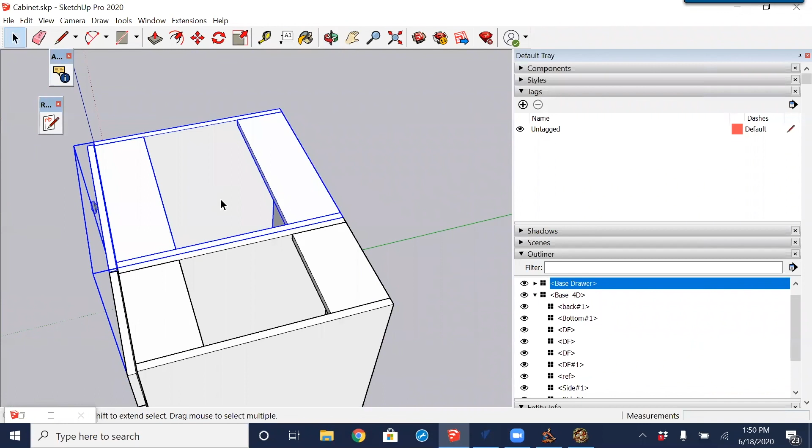What I did bring in that we're seeing here is another program. It's not VCarve Pro, this is Cabinet Parts Pro, and Cabinet Parts Pro is what is adding all the other features that are needed to build that cabinet. Yeah, no, when bringing into VCarve Pro, whatever is drawn on that component will be imported into VCarve Pro on that component.

VCarve Pro and Aspire do a great job for a lot of two-dimensional type work, but I wouldn't use either one of those for cabinet making. If you're a cabinet shop, you'd still want VCarve Pro and Aspire to create some of the specialty items that you might need, some valances, some custom radius type work. But if you're looking for specific cabinet making software, you're looking at Cabinet Parts Pro, which is a basic data entry program, or a program like KCD, which is a full, you design it, you draw it, you lay it out, and then it goes to the machine. VCarve Pro is great software. Aspire, great software, but there are better tools specifically for certain industries.

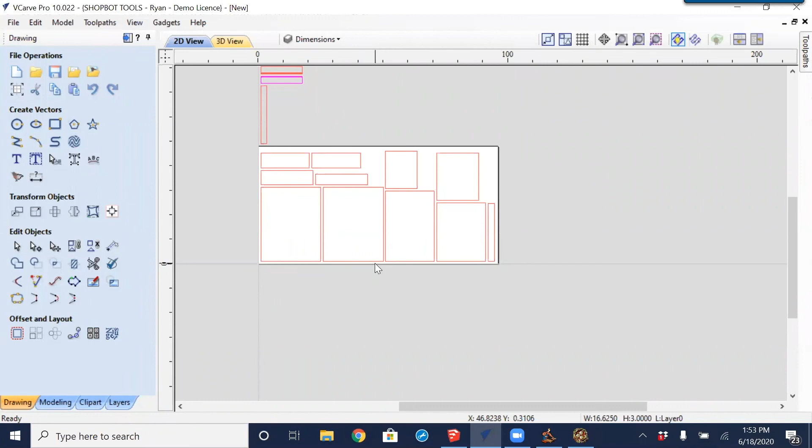Yeah, absolutely. You could draw those parts after the fact in VCarve Pro if you wanted to, or if you were making your components, you could certainly use SketchUp, draw them in your component and bring them in. But yeah, you could draw those in here, all the holes, once you brought it in. But again, as a cabinet maker, it's a lot of work to go through when there's software out there that just does it for you, complete automation. But if you're just doing one or two for your garage or your house, certainly add them in there. But as a full-time cabinet maker, you wouldn't really want to go this route.

So I might use SketchUp for the design or the layout for the cabinets. A lot of people do that and bring it in. So you might, there could be, but definitely SketchUp for the layout presentation. But I don't know if I would entirely use SketchUp to draw in all of the dados, the shelf holes, and all of that. Mainly, a lot of SketchUp circles are not circles, they're polygons. When you import it into VCarve Pro, VCarve Pro does do a decent job of making sure that it converts all of those circles that are made up of line segments into circles.

But no, SketchUp I think is great presentation type software and good for the very basics of cabinet making. And again, if you're just making cabinets for yourself, your home, and not making them often, yes, SketchUp and VCarve Pro are going to do just fine for you.